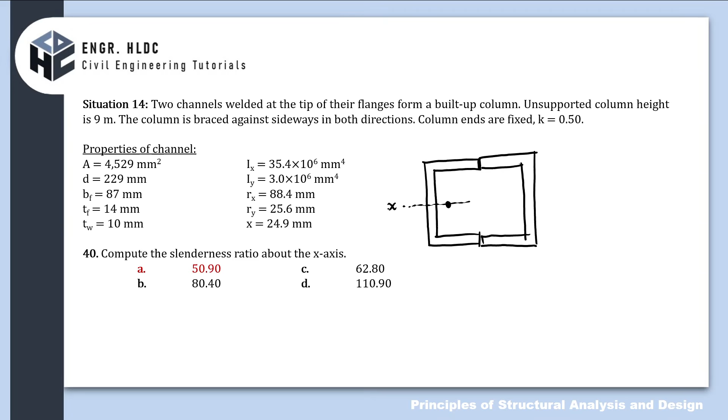So ibig sabihin, ito yung original centroidal x direction niya or x axis, and then ito yung centroidal y axis niya. Na sinabi naman according dun sa properties, yung x distance na to is the representation of the distance of the y-axis mula dun sa face nung web. So this is 24.9.

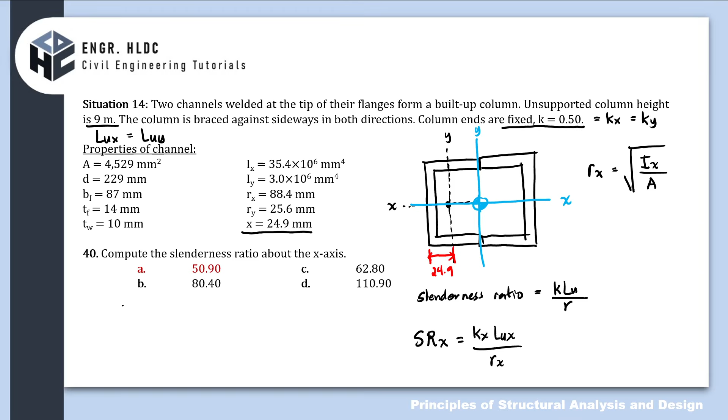So ang kulang na lang natin class is yung R. So Rx is square root of syempre Ix over area. Area is basically twice lang ng area ng isang channel, 4529. And then next, Ix. So, for the Ix, we will be needing here the summation of the individual centroidal moment of inertia plus Ad squared.

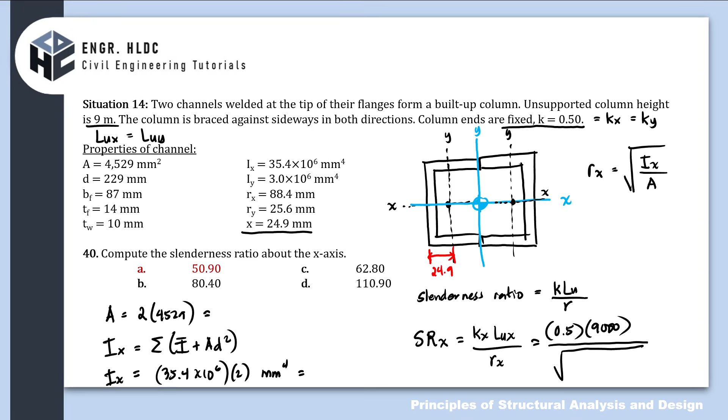Okay, calculate the area muna. 2 times 4,529 is 9,058. So this is in mm squared. How about, so I'll place this sa A.

Next, 35.4 E6 times 2, so sagot is 70.8 E6, or 70.8 times 10 raised to 6 mm raised to 4. So let's place that here: 70.8 times 10 raised to 6 divided by 9,058.

So that's SR along X or about X, store ko muna to sa B. So I will have 0.5 times 9,000 divided by square root of yung nakastore sa B divided by nakastore sa A. So the answer is 50.90. So the answer is letter A.

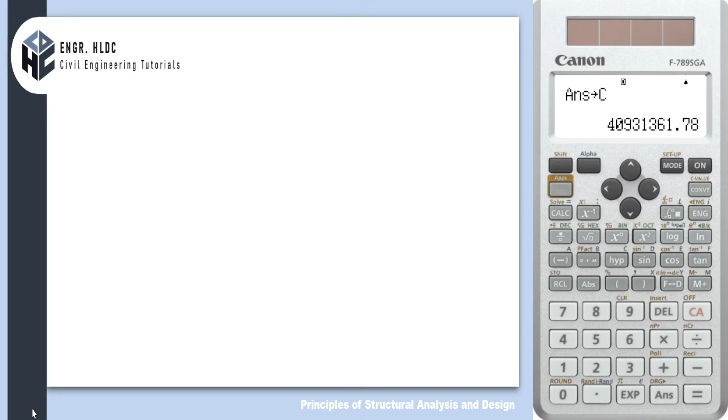So para sakto, store natin halimbawa sa letter C, and then balik po tayo dito. Okay, so sulat na natin, SRY would be, KY is the same as 0.5, LUY is the same as 9,000 mm, and over, ano yung number nun? 40.93 times 10 raised to 6 over 9,058.

So slenderness ratio about Y is 0.5 times 9,000 divided by square root of C divided by A. Okay, we have 66.94. So this should be our answer.

Okay, interpret lang natin class, ano ba ibig sabihin nun? Since mas malaki yung SRY versus SRX, it means na mas critical sa buckling yung sa Y direction, parang mas mauuna siyang mag-buckle kesa dun sa bending about X. Okay, so anyways, next tayo.

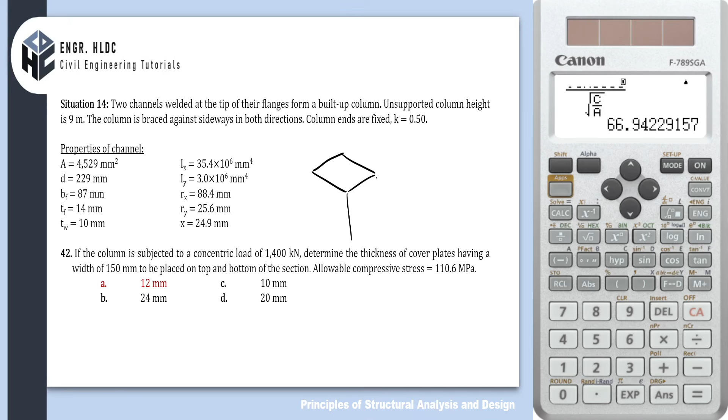So ito tungkol lang sa compression. So mangyayari, okay yung section natin, drawing ko lang dito, try ko lang kunwari medyo 3D. Okay so something like that. So nandito yung channel, nandito yung isa.

Okay so sana gets, huwag natin lagyan na ito. Okay anong gagawin? Ito daw magke-carry ng P na magkano, 1,400 kilonewton. But the allowable compressive stress of the material is 110.6 MPa only.

So I think mag-exceed kasi yung stress kapag siya lang yung meron. So anong gagawin? Maglalagay raw dito, dito na lang tayo sa class. Balik tayo sa top view, so mabibitin kasi yung section. Anong gagawin? Magdadagdag ng cover plate, ilalagay yung cover plate sa top and bottom.

So dito. Yan, para lumaki yung strength capacity ng section. So dito din. Okay, na ano ang meron na? Meron daw itong width na 150, ang kulang na lang class ay thickness. Okay, try ko lang ilagay yan dito, meron din dito sa likod. Alright, nagpakahirap tayo mag-drawing class.

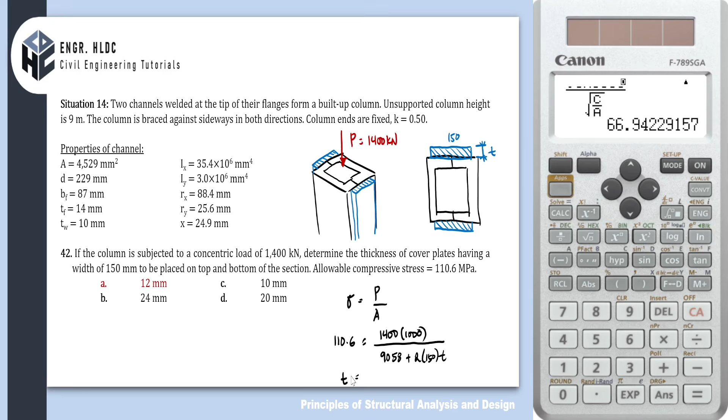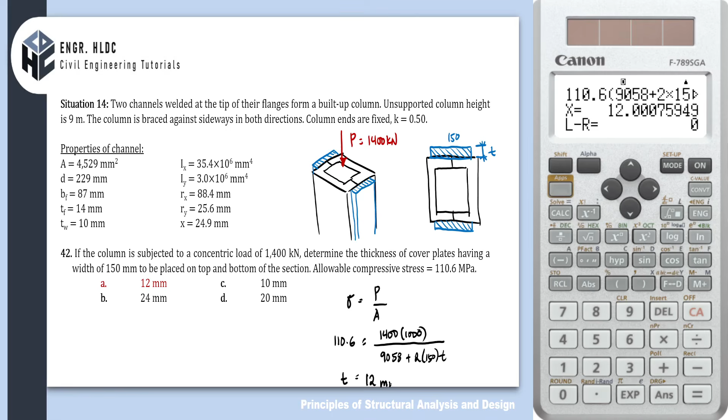Masolve na natin yung required thickness. Ako class, cross multiply ko na lang yan. Okay, so 9,058 plus 2 times 150 of x equals 1,400 E3. So shift solve. Sagot, requirement is 12 mm thick. Okay, the answer is letter A.

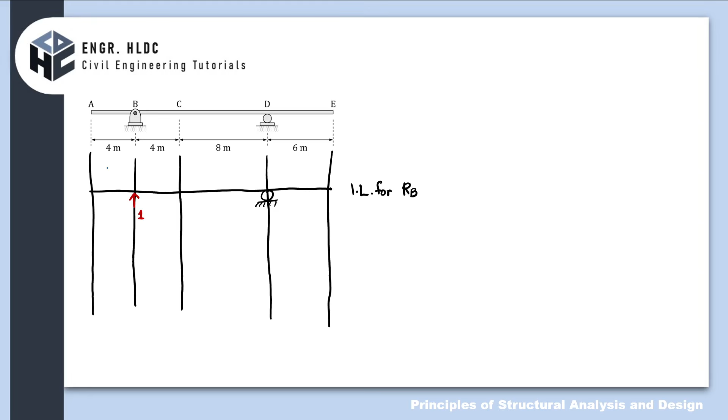And then what do we do? We push it 1 unit upward, and let the structure move. So what happens to the structure? When you push it, the orientation becomes like this. It won't move at D because at D, it's held by the roller support. So the deformed shape will, to scale, represent the influence line, making sure that the height at B is 1.

Okay, so what do we do next? Just use ratio and proportion for the other heights. For example, let's call this the y value. This is y at A, this is y at C, this is y at E. So let's get these through ratio and proportion.

So let's do it. We have a triangle, class. That 1, its base is 4 plus 8, so 12 is proportional to y at A. So the triangle containing y at A is which one?

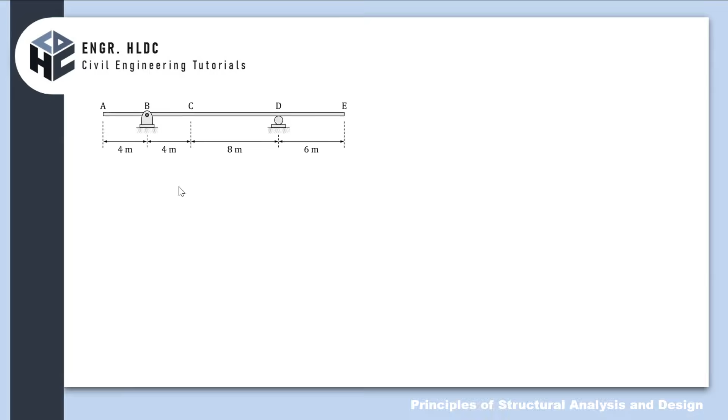Okay, wait. So I hope you can see this now, class. This y at A, this is its base, so 4 plus 4 plus 8, that is 16. It's also proportional to y at C, whose base is this one, which is 8. And then y at E, its base is 6.

So from these, class, we can get y at A, y at C, y at E. How much is that, class? For y at A, just cross-multiply the 16 with 1. So 16 times 1 divided by 12 is 4 over 3.

Okay, next, y at C. Cross-multiply this 8. 8 times 1 divided by 12, 8 divided by 12 is 2/3. And then y at E, the 6, cross-multiply with 1. 6 times 1 divided by 12 is 1/2. Is that right? So those are the heights we'll place here.

So next, after identifying the influence line, we may now position the loadings. We have the live load of 150, the distributed live load of 50, and the distributed dead load of 25. Okay, let's check back, is that correct? Okay, correct.

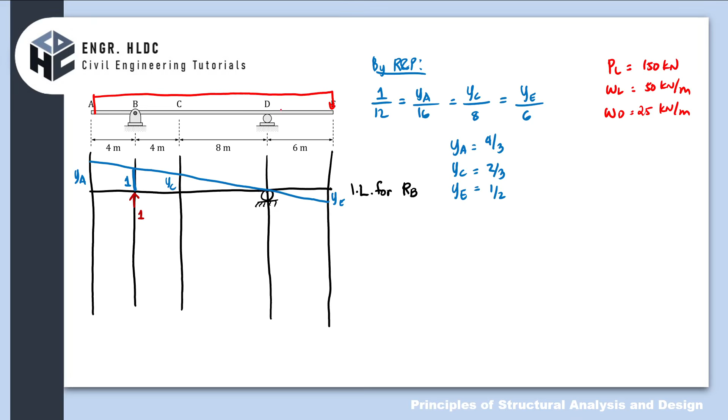So remember, class, the dead load has no choice but to be distributed all throughout the span. So this is always present here. Okay, there's no choice for dead load. So the one that moves, class, is the live load, meaning it's the only one flexible in position.

So if you want the maximum reaction at B, that is R-B-max, you have to position the loads where the height of the diagram it hits is the largest. That means the concentrated live load should be placed at A, where PL is, because that's where the tallest point is. And then for the distributed live load, of course, from A to D is the positive region, while D to E is on the negative axis. When you place a load on the negative region, the effect is negative, reducing the reaction. So therefore, we must position the distributed live load only up to D.

So, kapag ganito ang positioning ng loads, therefore we will expect yung pinakamalaking magiging reaction at B. So, to calculate that, we will just simply multiply the magnitude of the load doon sa katapat niyang height or ordinate doon sa diagram. So halimbawa, yung 150, ang katapat niya, yung YA, yung 4/3.

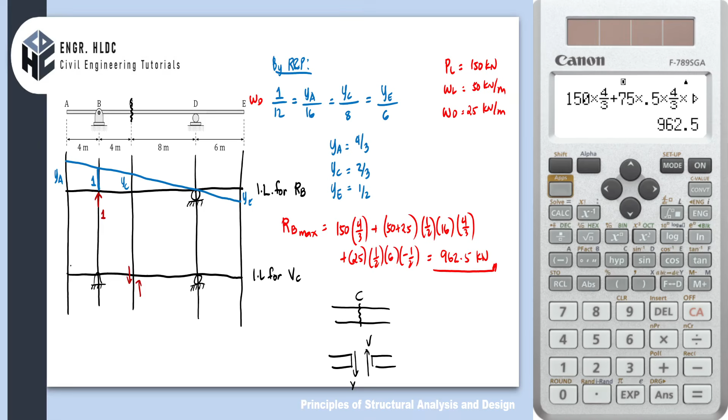Wait lang, lagyan natin ng tulak. Itong left side, tinulak kong ganito, tulak kong pataas. So what you can imagine is yung left segment matutulak ng paganito. Okay, dun sa may support, hindi dapat siya madi-displace, kasi nga may nakahawak sa kanya. At itong right side, tulak mong pataas yung beam, so ganito naman yung magiging itsura niya. So there you have it, this diagram represents at scale yung influence line for shear at C.

Alright, now burahin ko to. Okay, so magkakaroon tayo ng mga different Y values, so this is YA. Actually kahit hindi ko na to lagyan, dito na lang tayo mag-focus. Sabihin ko tong Y1, ito Y2. And then the rest, kunin na lang natin again by ratio and proportion.

So class, ano ang property pagdating sa shear? Ang property sa shear is this: una, yung sum ng Y1 saka Y2 ay equal sa 1, so this is the criteria for shear. What else? Yung slope nung line na ito, yung ABC na to, ay kapantay ang slope ng CDE. They will share the same slope. Ibig sabihin, ano ba slope dito?

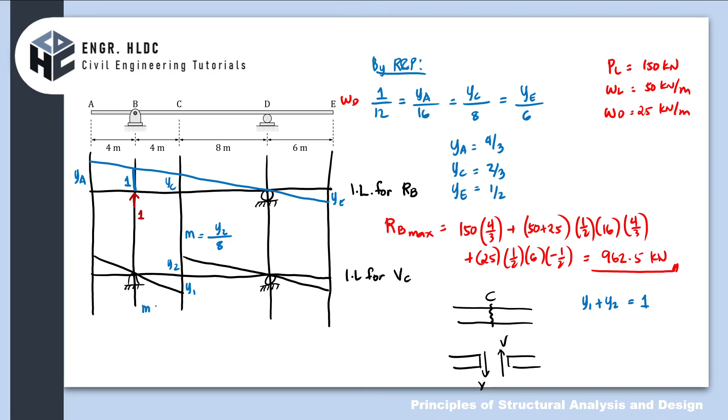Rise is Y2 over run is 8, so ito yung slope. Dito, ano slope dito? Rise is Y1 over a run of 4, so they will share the same slope. Sabihin natin m1 equals m2, so we will have Y1 over 4 equals Y2 over 8. So 2 equations, 2 unknowns, masasolve natin Y1 and Y2.

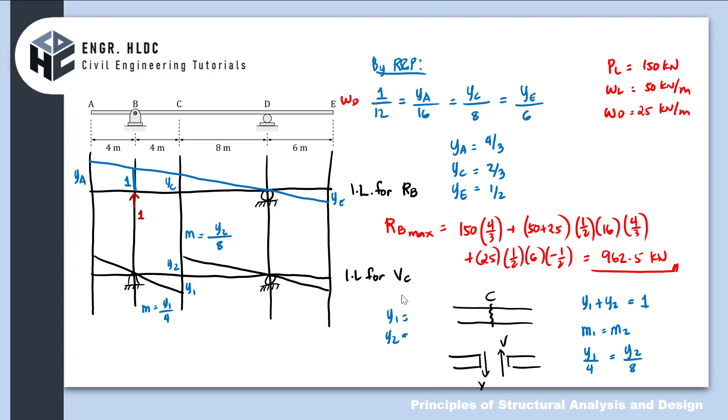Kayong bahala, pwede kayong mag-substitution method, or kung gusto nyo, input na lang natin sa calc. Mode 5, 1. Okay, lagay natin 1, 1 equals 1, and then next equation is 1/4. As ilipat natin yung 1/8, magiging negative 1/8, and then equals 0. So we have 1/3 and 2/3.

So, with that, no? So, ito, pansin mo to class. Di ba similar ito? Pantay na pantay. And ito, 4 ito, no? So, y1 over 4, ito, height dito over 4 also. So, which would mean na pantay lang sila ng height, no? So, this one here is 1/3.

O, dito naman tayo sa kabilang side. Okay, dito, y2 over 8. Ito, height dito over 6. So, didiretsahin ko na lang class, no? Pag pinipindot ko yan, parang ganito. So, height is 2/3. 2/3 for a base of 8. So, ano yung magiging height for a base of 6? Ako ganyan ko siya pinipindot class. Okay, so that the height sa may E is 1/2.

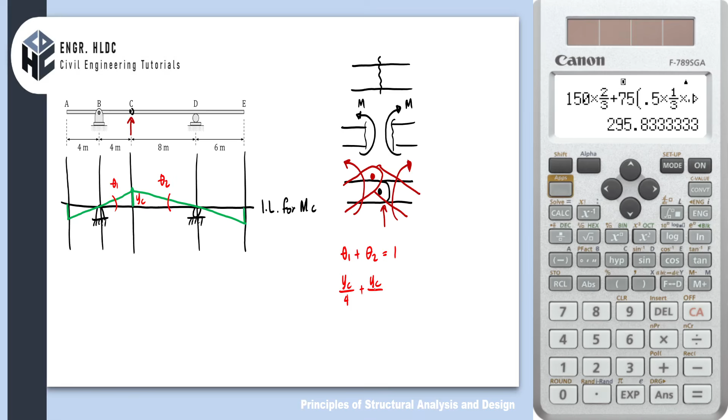So, slope, how do we get that? E di, kunin natin tong yc. So, slope is rise over run. Considering theta 1, so run is 4. Plus, slope 2. So, rise is yc also over a run of 8. And then, equals 1. So, makompute natin yc. Okay, so x over 4 plus x over 8 equals 1. So, sagot 2.666 or that is 8 over 3.

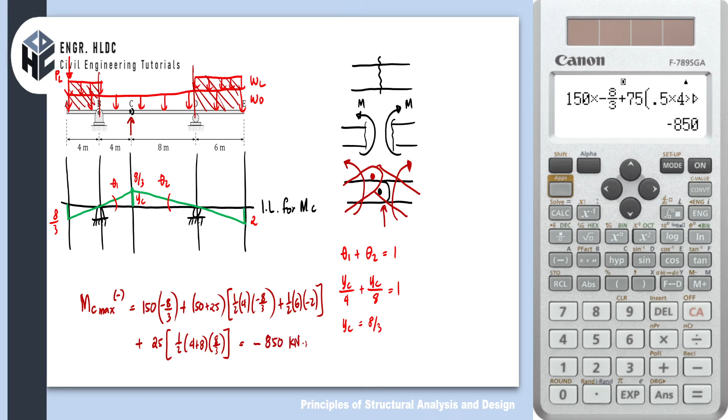Alright. So, magkano po ito? 150 times negative 8/3 plus 75 times 0.5 by 4 by negative 8/3 plus 0.5 times 6 times negative 2, okay, plus 25 times 0.5 times 12 times 8/3. Sagot negative 850. So, the unit is kilonewton meter. So, ayun nga, no? Negative nga yung lumabas. Okay, so, are we correct? Alright, correct.

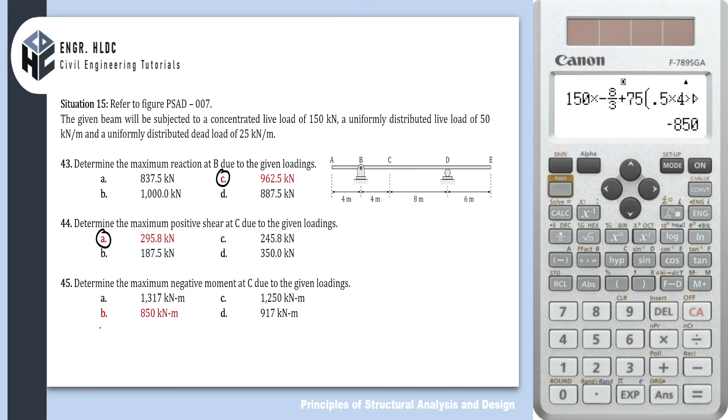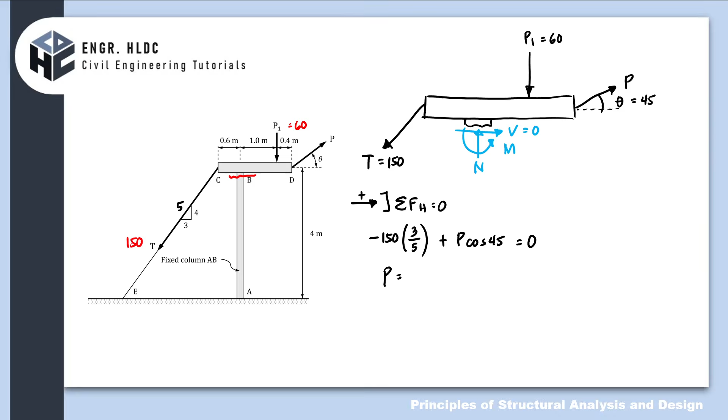So, transpose ko na lang, no? 150 times 3/5. Divide natin ng cosine 45. Okay, sorry. So, balik. So, again, trinanspose ko na lang class, no? 150 times 3/5. And then, dinivide ko ng cosine 45. So, our answer is 127.28. So, ano units? Kilonewtons, no? So, letter A.

Okay. Next. So, nag-iba yung data yata, no? So, P1 is 60. Theta is 45. Tapos, pure axial compressive force in column AB is 108. So, determine the maximum force P such that the compressive stress in column AB is due to pure axial compression. So, as you may remember class, di ba, ang compressive stress or in a sense, normal stress is force over area kapag ang source ay axial force, no, yung P.

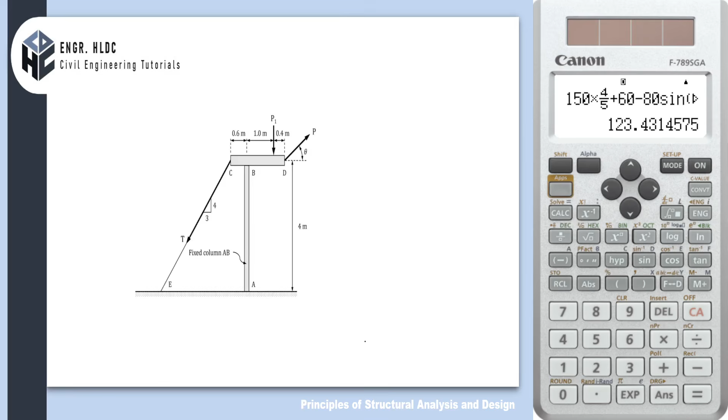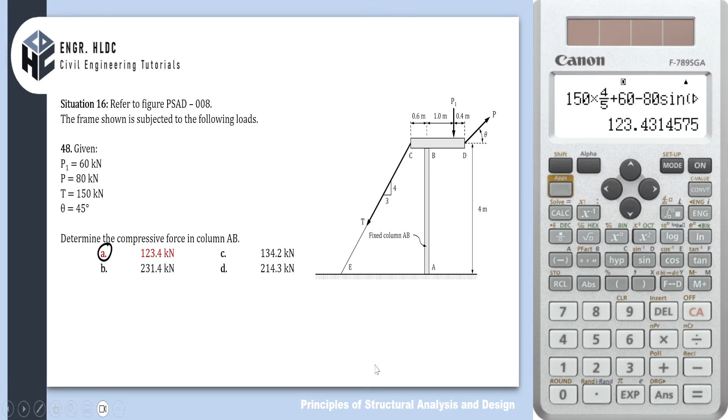So, lipat ko na lang sa right side, no? 150 times 4/5 plus 60. Then, minus 80 sine 45. Okay, we have 123.43. Okay, kilonewtons. Okay, and then that's it. Okay. So, okay, next, ano tayo, class?

Situation. So, for the figure shown, assume that the section has cracked and use transformed area method to compute the flexural stresses, no, for the given loads and moments. Okay, determine the maximum bending moment of the beam. And then, ano pa yung ibang tanong? Calculate the stress in concrete. And calculate the stress in steel.

Okay. So, dito class, pinapagamitan tayo ng transformed area method. Eh di parang ano to na class, no? Parang WSD or yung alternate design method. So, paano nga ginagawa doon class?

Okay, simulan muna natin class sa pag-identify ng moment. Okay, ano ang load? 135 saka 30. So, this one here is 135. This is 30 kilonewton per meter. So, first, identify natin yung support reaction. So, okay lang ba class? So, shortcutin ko na. Tingin na lang kayo sa CalQ.

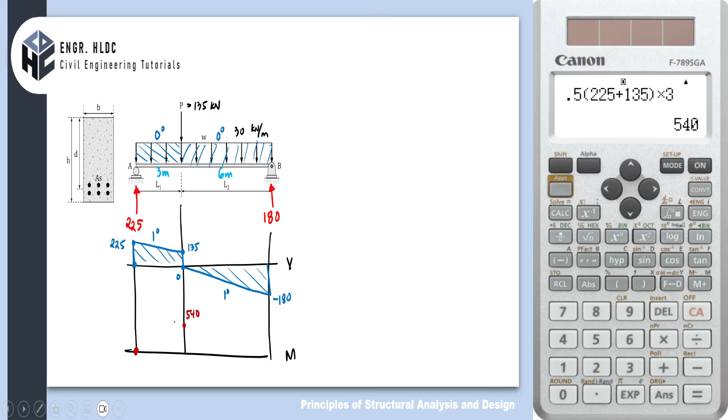So, 0 at the starting point. So, plus natin yung area ng trapezoid. So, 0.5, base 1, 225, base 2, 135 for distance of 3 meters. So, 540. So, positive area, aangat, no? 540. So, how do we connect? First degree, dapat second degree, no? Curve. So, what type of curve? So, as you can see, 225 to 135, decreasing. And then, anong curve ang may decreasing na slope? So, may positive slope, tas naging negative slope. So, yung curve na concave downward. So, ibig sabihin, pag ganito ito.

Okay? Next, negative area. So, plus, triangle, 1/2. Base is 6. Height is negative 180. So, nag-0. So, which means, no? Medyo tama yung naging analysis. So, first degree. Second degree dapat dito. So, anong second degree? So, 0 naging negative 180, which means decreasing. So, concave, downward pa rin. So, therefore, we will have Mmax as 540 kilonewton meter.

Okay. Next, for the stresses, as you may remember, nangangailangan ito class ng pagta-transform nung materials into a single material, no? Now, usually, we convert materials to concrete. Okay, so wait lang. Okay, lipat tayo dito. So, paano nga yun, class? So, wait lang. Dito na lang.

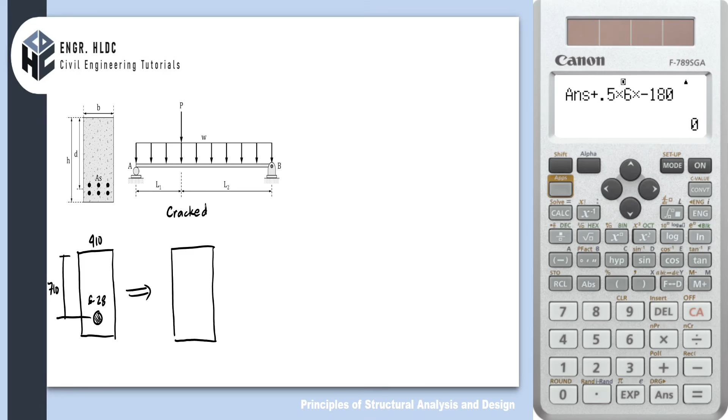So, ta-transform natin, class. Gagawin natin lahat silang concrete. Pero nabanggit kasi class, crack. Ibig sabihin, lagay muna tayo ng assumed location ng neutral axis. So lahat ng nasa baba na concrete ay crack na. So ang meron na lang tayo dito class is yung AS. Okay? So ang meron na lang class is yung concrete dito, tapos yung steel sa ilalim. So, define natin to class to be 410. And then yung height dito is y sa top.

Or sabihin natin yc. Tapos itong nasa ilalim yt, pero hindi ko nalalagay class, no. Pero ang gets nyo class, yung hanggang dito is ano to? 710 minus yc.

Okay. So, ang gagawin natin class, ko-convert natin ito to equivalent concrete. So, paano nga yun class? So, as you may remember from your WSD, na crack section, you just simply multiply the AS by the modular ratio N. So, binigyan tayo ng N class, I believe. So, ayan, nakasulat class, no? 8.

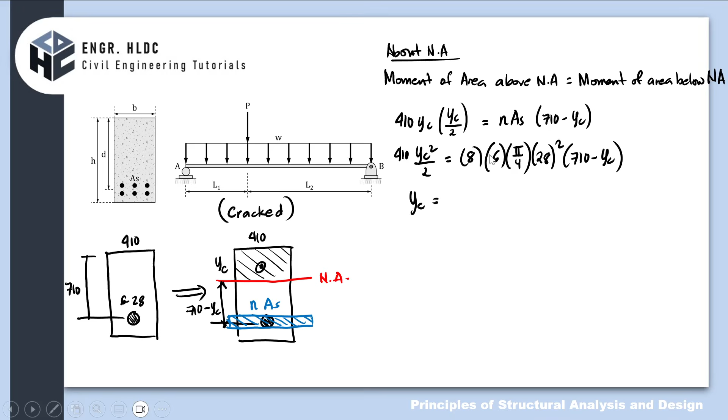So, YC, location of neutral axis is 410 x squared divided by 2 equals 8 times 6 times pi over 4 times 28 squared, and then 710 minus x. So, shift solve.

So, sagot 255.878. So, maganda siguro, store nyo na lang to. So, on our case, nakastore na yan directly sa X.

So, next thing to calculate is yung moment of inertia. So, sabihin natin moment of inertia of the crack transformed section. So, ito ay summation of I bar plus AD squared. So, start tayo dun sa rectangle sa taas. Yung 410 by YC. So, ano ang moment of inertia niyan? Centroidal. So, di ba nandito yung centroid niyan?

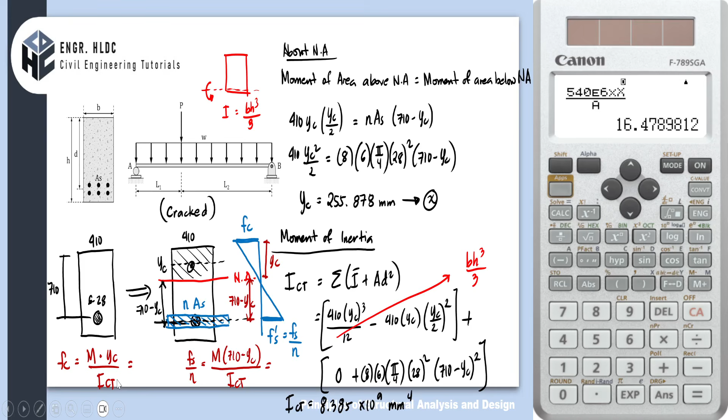Okay, since I have no more space, let's just compute. So for FC, the moment we're talking about is the maximum moment, earlier that was 540 E6. So YC is X, times X over ICT, in A. So what's the answer that comes out? 16.48. So this one here is 16.48 MPa - this is the stress felt by the extreme concrete fiber.

Hopefully that's clear? Okay, this one here - letter B, and the next, calculate the stress in steel.

So now we move to the second one. M is 540 E6 times the distance of the centroid of the steel group from the neutral axis, so 710 minus YC which is in X, divided by ICT. So if this is what you compute, MC over I, this is F prime S - this is the stress if it were still concrete. But if you convert it back to steel, the area becomes smaller, the stress becomes larger, so we have to multiply it by N. So the answer is 233.97.